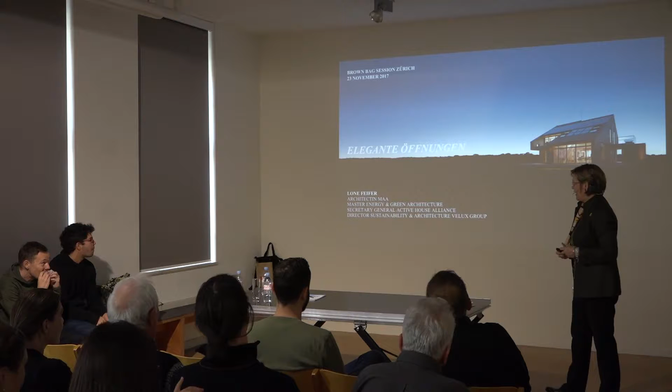It's a pleasure to be in Switzerland, actually always, but it's a particular pleasure to be able to talk about an introduction to the topic of Green Solution House, which is a project that Kasper and I have worked on since 2011. I am an architect by education, specialized in sustainability. And I happen to be director for sustainability and architecture at the VELUX Group. So there is a good match between these fields, and I'm running the Active House Alliance. I'm leading that on a daily basis. I'll come back to what we mean with that.

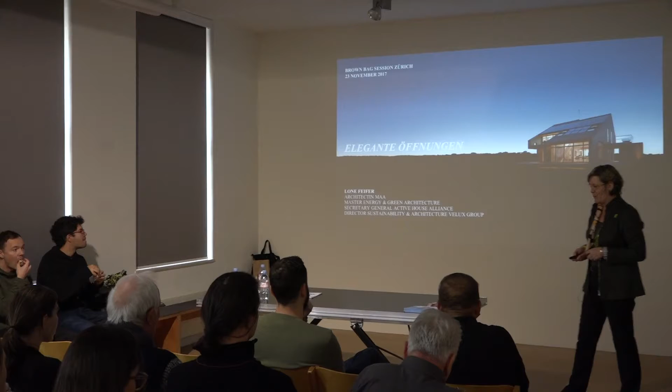First of all, to the VELUX vision, it is probably known to you. We have a vision that we would like to introduce as much daylight and fresh air through the roof. That is our business. And we would also like to be assessed by our customers as the best in class. Well, that's you also.

So this is what we aim for. We have been working with that since 1941, when our founder, the engineer Villum Kann Rasmussen, started VELUX. It was during the Second World War. There was scarcity of square meters. There was scarcity of building materials during the World War.

And he started inventing a roof window, or a skylight as it was at that point, in 1941, which made it possible for a school to make a classroom in the attic. So that is how it all began 76 years ago, and we are still true to this vision, and we believe very fondly in it.

The same founder of VELUX, Villum Kann Rasmussen, said 3 years later, "One experiment is better than 1,000 expert views." And this is hanging on a metal board in our workshop, it is engraved in granite when we exit the headquarters, and it's hanging in a lot of our factories. It's very profoundly the approach to how we deal with experimentation, new products, new challenges.

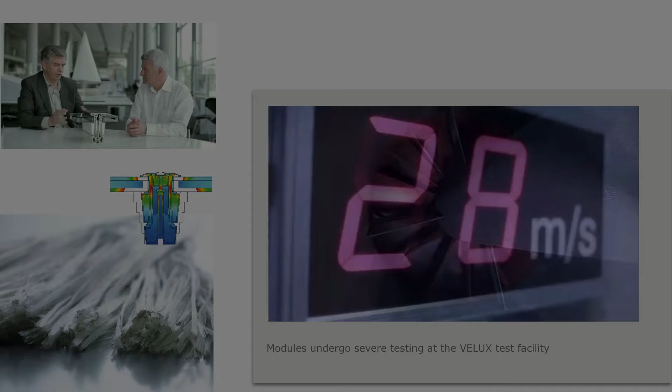When we get back to the PowerPoint, you can see it looks like glass fibers, a little bit like hair before you pultrude it, and you are able to make it into a profile which is very, very strong. It has very good static abilities and also excellent thermal abilities. Here it is being tested in our test center, which is the largest in Northern Europe, and they are putting up the wind speed more and more. It is very thoroughly tested.

You can see the profile here. This is what they developed. It's fairly high as a profile, but also very slim. And for those of you looking very closely, you cannot see the difference whether the profile is openable or not. Something which our sister company, VELFAC, has had a lot of success with in their facade windows. I know that's also known to some of you.

And from there, they developed a lot of different systems for glass roof or skylight applications, which has resulted in the many systems available today. I have a number of colleagues who are experts in this and can tell you about the Swiss applications. And installation was a major focus, because Foster & Partners said, we can go and buy the theoretically best possible product on the market, but it's in the installation. It is often something that has to be handmade and fitted on site. So they wanted something as close to off-site construction as you can get.

And this is where the VELUX approach comes in, because we started with a modular approach, and we have, so to say, defined the standards for classical roof windows. And with this approach, we approach the skylight. It's a modular format, and it's very easy to mount very quickly. You have the building closed very, very quickly. And it is a very secure and tight way of mounting it.

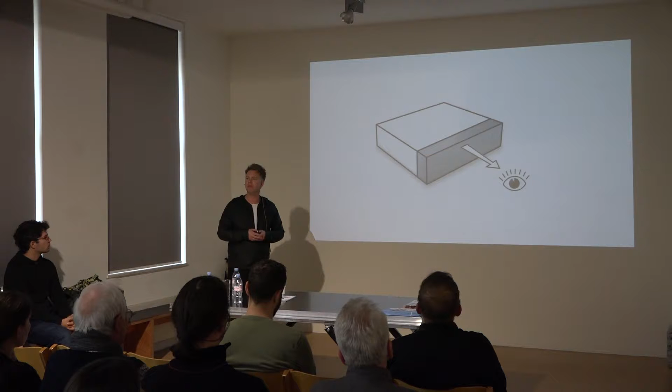It's also a modular skylight. This is, however, custom tailored, but it's giving kind of a signature to the roofscape of the building. But what's more important is how we then define the whole building, that we have access to a beautiful view of the water, but how can we optimize that? Then we are kind of triggering the geometry of the building to actually create a large surface that can view the water. And also within the geometry of the building, we shield from the overheating of the building to give it a great, you can say, energy performance, but also framing the view to the ocean and creating a lot of daylit workspace.

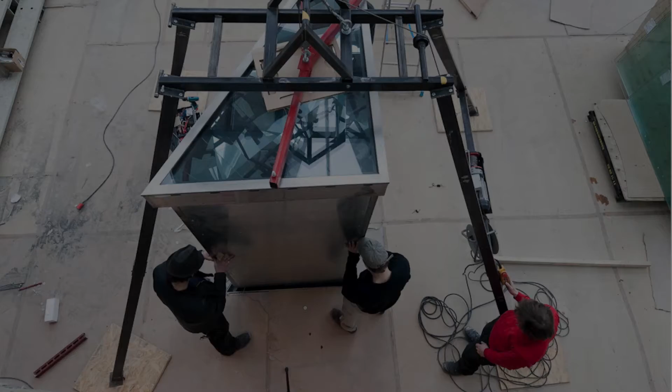We like this roof so much that we also collaborated on making some integral art pieces of this. I don't know, it didn't show. Yeah, here's some. We actually made these kind of 8-meter deep wells in the ceiling, from the ceiling and into the floor. So when you walk on the floor, you actually get this mirror reflection of the roofscape. So it also becomes this kind of artwork created with the daylight and with the geometry of the building.

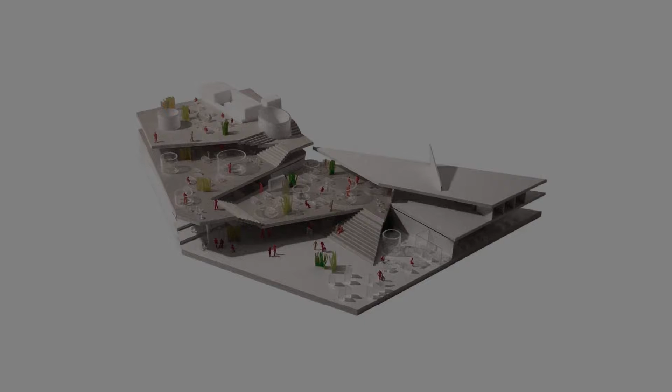But in this talk, I'm more focusing on the qualities of the life inside the building. And I think if we kind of remove the roof, you also see that the whole building is built around kind of a terraced way to create an open space. And we believe that architecture can stimulate the way you work, the way you communicate, for example, the way kids learn, or you can stimulate curiosity. We're really excited about how we, as architects, can understand space and the behavior in the space.

And this was very much about breaking down a large space into smaller divisions. So the people working there actually were dimensioned to the ideal group sizes, but also you use the movement to have people meet, and the staircases as kind of social furnitures. And the lower level in this bank was kind of a public space to the city.

So that's where the bank invited the people of the city in to have concerts and Christmas tree parties, etc. And what's also interesting is that then we deliver the project, but we also go back and we have been monitoring this building intensely for 3 years, like what works and also what does not work, what can be optimized.

So I think that's a key learning, that we are not just object makers, but we also want to have a longer relationship to the people that we are working as architects for, understanding the building. This is a good example because the last 3 years it's been the best workspace in Denmark, and this year it's been rated as I think the second best workspace in Europe. But you can see how these things work, and also how we then try to learn from it.

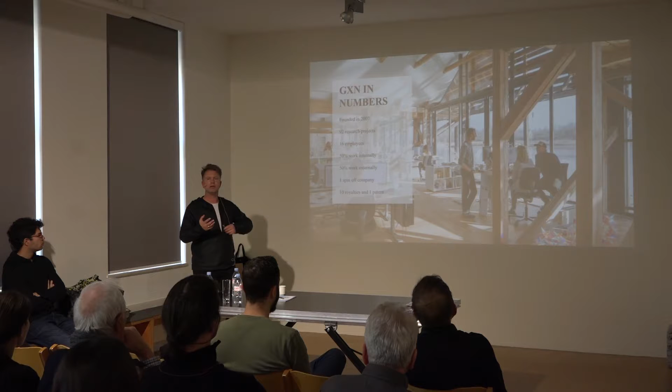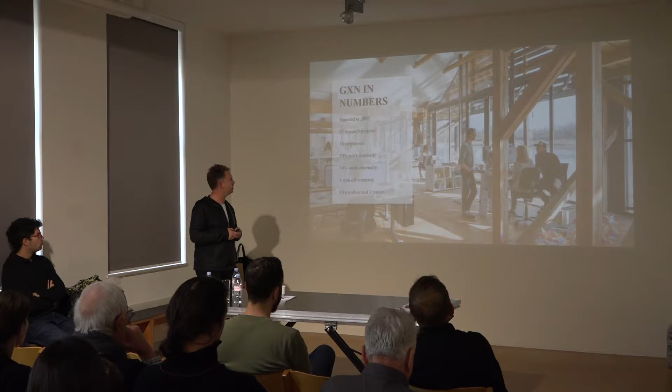So it's becoming this kind of test space within the office, because you can't just take untried materials in on a commercial ongoing project. So we're trying to test and develop and document new innovations before we then can implement it in the ongoing work of the office.

So this is another from my team. He's called Ken. He said, well, in BIG, that's just how we do it. We have a concept, we make a building. It's straight, no deviations. I mean, this is a very easy way to communicate it. But this is how he sees working in GXN. We never have the answer, and we always are exploring, detouring, finding out more than one solution.

So I think the idea is that it's combining a trimmed professional architectural practice with a, I wouldn't say untrimmed, unprofessional, but a question-driven, explorative approach, and that is what allows us to bring new ideas to our buildings. I have two chapters. One is circular design, and I think that's more or less what we've been doing for 10 years. The other chapter is behavior design, and I think that's what we'll be doing for the next 10 years.

So, circular design and sustainability. To me, I had many years where sustainability was equaling energy performance, and sustainability was about addressing the problems in the building industry. We use too much energy, we produce too much waste, the CO2 footprint has to be smaller. But then if you think about nature and nature's ecosystems, everything is in circles there, how all resources can be used for new things. For example, the body mass of ants in nature is bigger than people. And they don't produce any waste. So waste as such is not something that exists in nature.

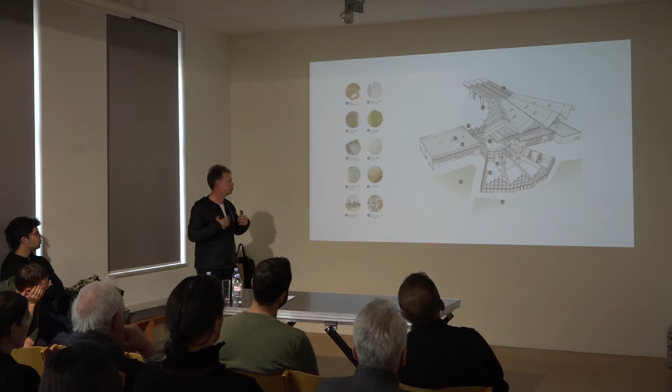So as said, the building is really small. And you see two existing hotels on the right and left that got renovated. And then we squeezed in this kind of fan-shaped conference room in the middle. In total, there are 75 solutions. I'll just mention a few of them.

But just going back to the point that you need to be able to explore the things that create value for you as people. And when you're there, it's on an island, it's beautiful. It's about the light, it's about the air, it's about the nature. And also it's about the rhythm of the day and the seasons. So this is actually what's really present when you're there, the light, the air, and the nature.

But we also had the building to take down, and we reused all the materials. So we said, we need to make this kind of cycle ecosystem on the site. We can take the old glass and foam it up to new insulation. We also took trips to the neighbors and said, this is a granite works. Denmark is super flat, and this island is the only island in Denmark where we can get access to stone. So we were super excited, and also the byproduct of cutting a stone is the dust from that cutting.

So we took all that dust and we took the building waste that was produced when we tore down the buildings, and we created what we called a bitumen-free landscape. So we didn't want any asphalt, any oil in our building materials, and we wanted all the soil to be able to accept the water and use the water positively. So this kind of water and soil balance.

So besides being a building project, it was also a landscape project with some brilliant landscape architects called SLA, making these seasonal lakes and making a full balance so the water could be treated on site, but we also made the geography so we could invite the water from the neighbors when there were heavy rains. So we were making something positive beyond the border of our site.

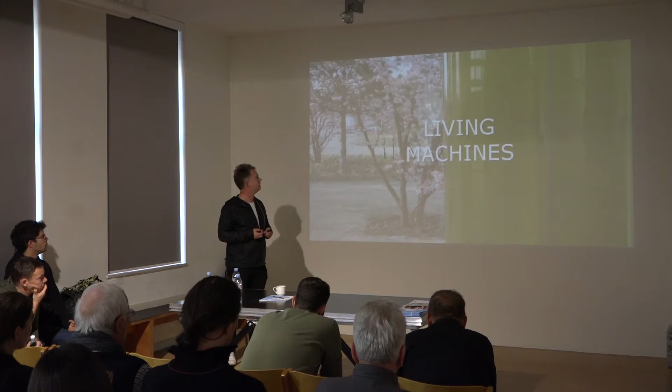So outside was one concept, and we also needed to bring the water treatment inside. The whole process was about establishing these kinds of cycles, life cycle design. And inside, we were working with what's called living machines. So we actually visually put up these algae tubes so we could recycle the water, having the microbes of the algae cleaning gray and black water, having the plants outside be this kind of earth lung, so they could take the scent out of it. And creating green walls, and of course sanitary where you could recycle the water.

And the whole idea is that we have a dialogue between the landscape and the building, and the water can be used and recycled. And again, we needed to do the same for all the materials. So we asked all our partners, we want things to be designed for disassembly. We are very careful when we build, but we are very uncareful when we take apart. So we need to see our buildings as material banks that you are able to take apart and reuse,

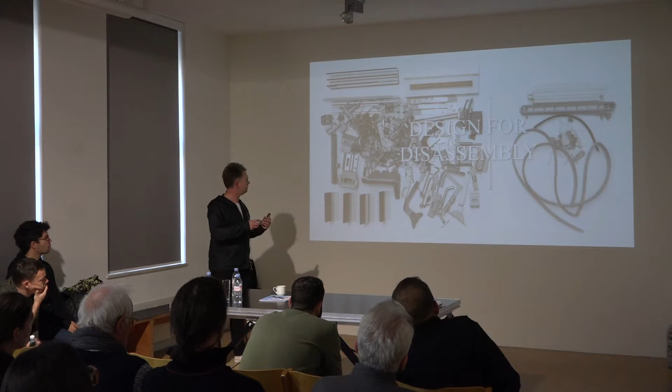so you eliminate waste. And this is actually Velfac, the sister company of VELUX that Lone mentioned, that after this project have documented that they can recycle 93% of all the materials. And this has started to change, at least in Denmark, the sustainability agenda there, so that we think about how we can take buildings apart and how we can reuse materials positively.

Inside, in the hotel rooms, we wanted to make what we call smart rooms, or focus on the air. As Lone said, it's worth a thought that you are actually inhaling and exhaling 15 kilos of air per day, and you're just eating 1 kilo of food. So what if we can provide the best air quality possible? So we developed material filters and material passports. When we tendered the materials, we made sure down to the chemical level that they were healthy. This had actually positive effects.

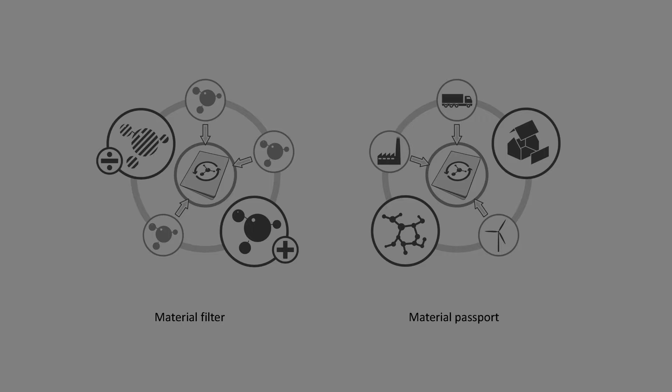We chose paints that were breaking down formaldehyde. We used surfaces free of toxins. We bought carpets that were actually capturing dust particles of a size you don't want to have in your lungs, that you then remove when you vacuum. And in order for the guests to understand this, we developed these tablets together with Autodesk Research on how you can document the indoor environment, focusing on energy, light, air, and water.

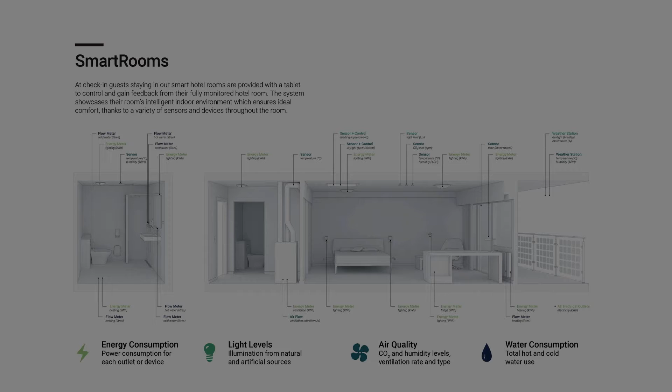So you check in, and you don't see all this. These are technical sensors that are not visible, but make the room intelligent, and make it possible for you as a guest to see what is my consumption, what is the production on site, and what ecosystem am I part of? And you can also not use the tablet if you just want to have a normal stay. But the idea is to make this visible and enable people.

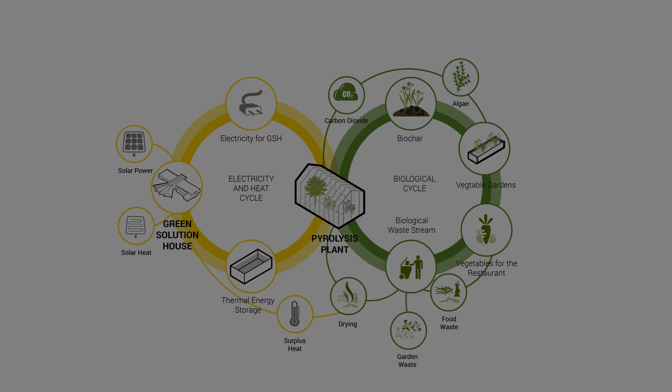We also thought about the energy. How can we work with that? I guess you also saw some of the skylights with PVs in them. We had a lot of different photovoltaic and photothermal, so just taking the heat out of the sun, an electricity and heat cycle. But we also wanted to make a biological cycle. How can we take the food waste and biological waste?

So we designed the kitchen so we could take all the biomass out, but also talked to the neighbors and a hospital on the island about how we can take all the biological leftovers from their kitchens. And we make energy from that, not by burning it, but by heating it up so we can take out the electricity and the heat. But as a byproduct, we get biochar. So actually, we don't put carbon dioxide particles in the air. We just keep them as fertilizer for the soil and the kitchen gardens.

So we try to reinvent how we see energy, and how we can then, with that fertilized soil, grow new vegetables that can serve in the restaurant. And I think this is the last slide on this project, but just thinking about how we can integrate an idea of circular sustainability.

So the last chapter is behavior design. Popularly speaking, I'm saying that's from this year and 10 years ahead. We've been very focused on the materials, on the ecosystem design. Now it's time to learn a bit about what drives value creation in architecture. These are reports that we are super interested in, and some of the interesting findings are that buildings can improve overall productivity and performance by as much as 12.5%. In total, there's a 30% swing between good buildings and bad buildings in the way they perform.

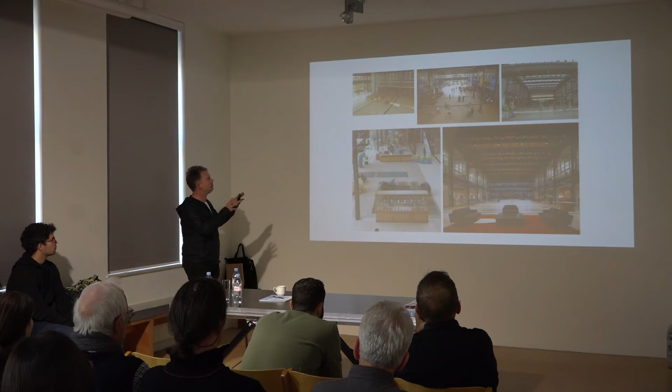I was very inspired reading the Steve Jobs biography, where he says if a building doesn't encourage collaboration, you lose a lot of innovation and the magic that's sparked by serendipity. So they design buildings to make people get out of their offices and mingle, and in that way be creative and innovative. Then I Googled the building he was talking about. And I don't think it was that kind of magical as he mentioned it.

So I think it's also important to think about what is your intention and what is the reality. So we need to think about it, but also document it and learn from the work we do. So we believe that architecture shapes behavior, and we also think, obviously, that behavior shapes architecture.

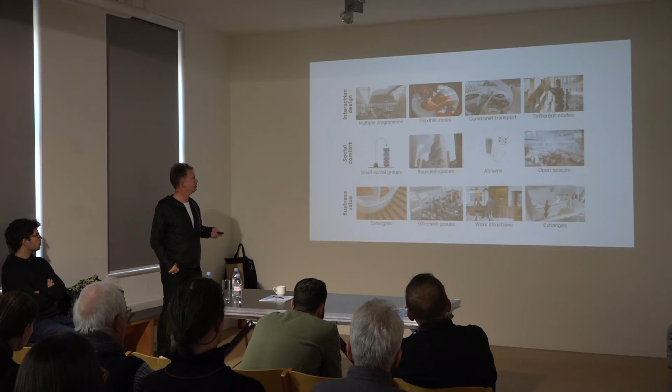So we have put together a research cluster of 7 people that for 5 years will find out what we can learn from business science, from social science, from different sciences and evidence found in research, and how we can relate it to business value, social comfort, and interaction design. So this is our next book coming out, I think, in December. And this is about everyday life in the built environment, how we learned from the buildings that we documented.

So we put out this theory called social affordances, that it's about understanding the people, the culture of the organization and the country, and it's about seeing what the space can do to support this social synergy. So we started to look at our buildings as these kind of social furnitures, and this is a good example

of a building in Norway that is becoming more a part of the city, that connects a residential area with the city center, and we do that by making all these staircases. And also this city every summer kind of explodes into the most popular jazz festival in Europe.

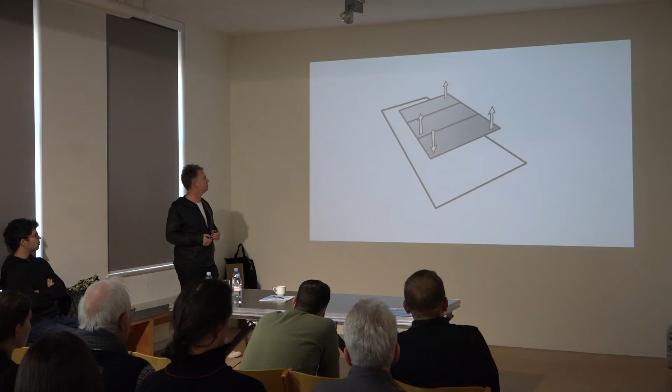So it's about connecting different levels of the city, but also creating all these possibilities for people to sit and view and enjoy the different performances and connect the city. So again, it's about staging these moments and having the behavior in focus when we design.

So I think the last project is what actually was the defining project for us in understanding the effect people have on the architecture they're surrounded by. So this is a central staircase in a high school in Denmark where we won a competition, and the brief from the government of education was, how can we make a school where the students are learning not just from the teachers, but also between each other and between the different topics. How can math stimulate biology, etc.

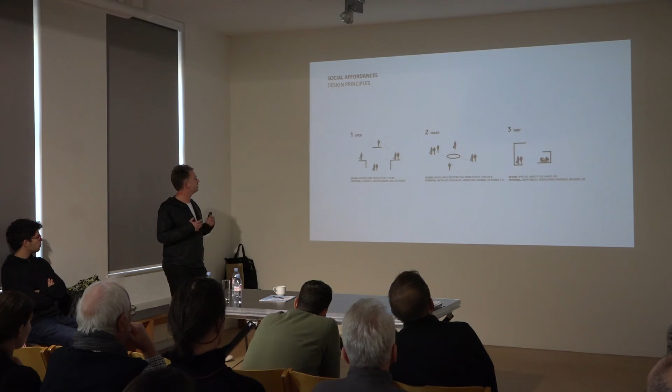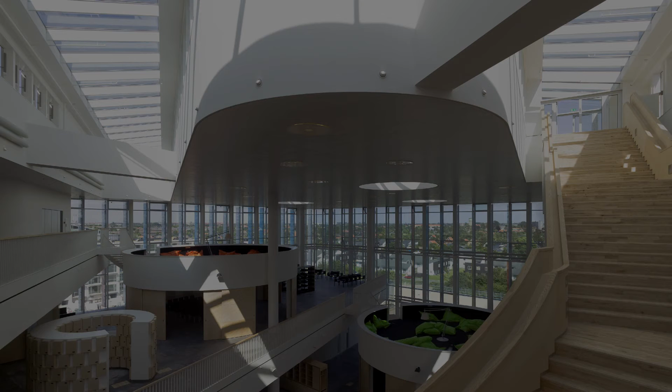So we made this out of these design principles: we wanted to have open space, we wanted to have shared space, but also varied spaces. It's not just to have one big open space, it's about having a whole variation of different spaces. So actually we took away all corridors and made one big open connected space, but then made a lot of different spatial variations. And also this visual transparency allows you to actually sit on the 5th floor and see on the lower floor how you can do gym, etc.

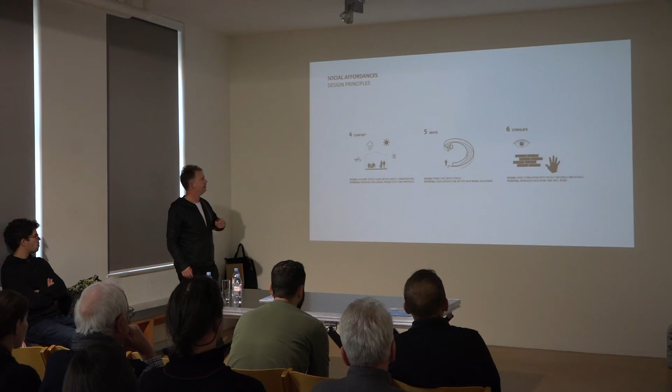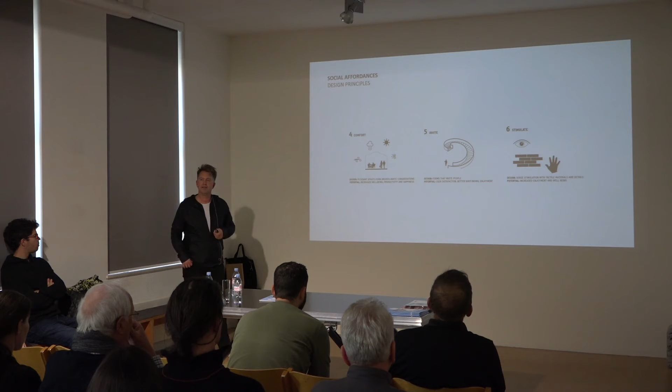It's about focusing on comfort. It's also about making invitations in the architecture, inviting people to use the staircase, for example, and also about stimulating people with the materials that you choose. I think it's super exciting to be here today and see that you have this fantastic material lab that you can access. So again, you see how the students actually are using this space.

There are areas where you can go in and do some more introvert, concentrated type of studying, and in that way the students are seeking and controlling their learning environment themselves.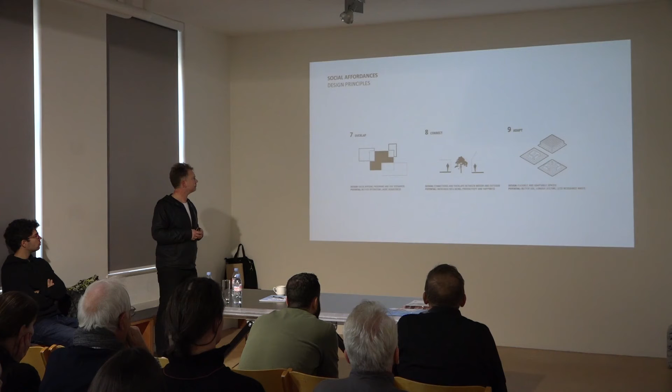And it's about creating overlapping, connecting, and adaptable spaces. So you can see how also this building kind of changes, and also how it's used as how you would study at home. I think this is super important, and for us was a defining moment in actually understanding what value we can create with the buildings that we propose.

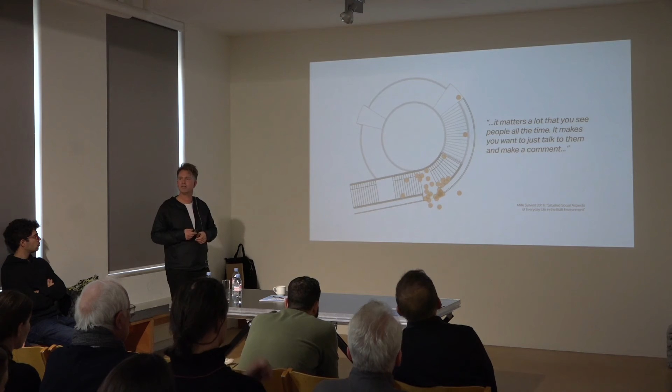And I think a lot of these things you can actually find in the IOC headquarters, even though those two buildings are so different. And we go back and document. One interesting thing: we had this idea that you stop on the staircase and start engaging in conversations, and we were giving the staircase a very wide profile. But we found out that it's actually in the landing that people stop and meet each other. So now we are very concerned about these areas of our buildings and finding out how we can optimize the meeting potentials.

So the last slides are a last research project, and together with VELUX we have started a journey on healthy buildings that promote the well-being of people. And this comes from some other documented research that, again, over a 30-year period of time, the building cost actually gets really small. It's only 2% of the cost that you normally have your full focus on. So if you start to see how buildings can affect behavior, you can actually start to make an impact, and you can argue for the choices you make as an architect.

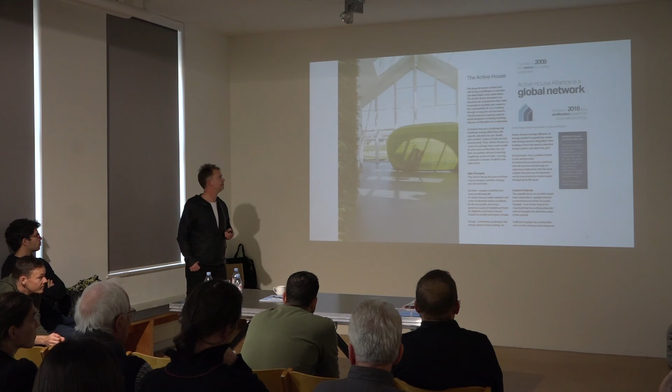So we are working with the Active House Alliance because they, as one of three rating systems internationally, have this focus on comfort. There's Active House, there's WELL, and there's the Living Building Challenge. So again, we spend 90% of our time indoors, half of our time working indoors. So we need to affect that. This is actually how it's measured.

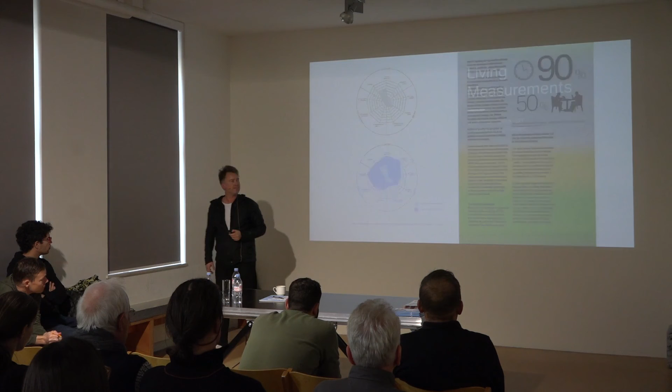This is Green Solution House, you would say, before the renovation. This is kind of a comfort compass. So the bigger the imprint, the better the comfort. And the comfort is up here. So see, after the renovation, we actually maxed out on a lot of the comfort parameters. So you can use it as a tool. But we also want to not just predict it, we also want to measure it.

So Living Measurements is an initiative together with Leapcraft, some software and hardware developers, where we are actually starting to measure the ongoing indoor climate at Green Solution House. So we have these displays measuring CO2, humidity, daylight, temperature, and acoustics, and actually learning from it: how can the building become more intelligent?

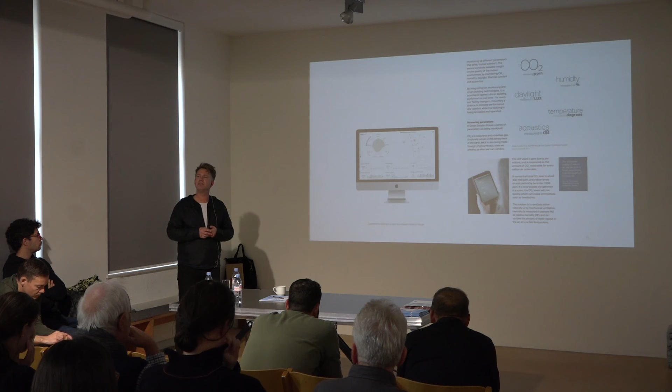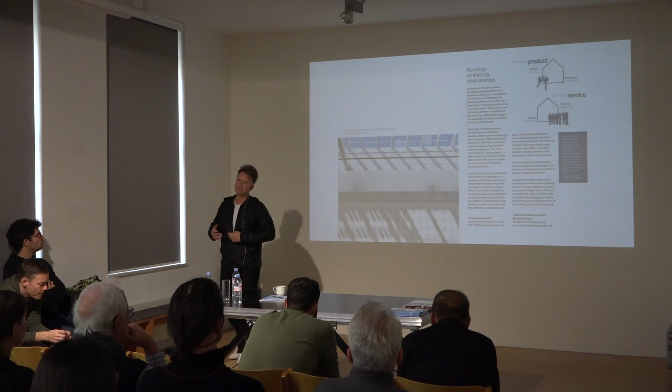And I think it's interesting how you can start to learn from buildings, but also make buildings that are more dynamic and not static. So I think one of the key takeaways is going from buildings as a product to seeing buildings as a service or as a lifelong relationship. And the last few slides are just from the foyer. We had a fantastic photographer who spent the whole day there, so it has a lot of daylight in the day and a lot of moonlight at night.

But the one thing I just want to hammer in is that we believe that architecture shapes behavior. And by focusing on the people and on the comfort, I think we'll start to talk about prioritizing qualities that are the most value-creating that we can do as architects. So this is why I'm glad to be here, Lone, with you. We did the Green Solution House, and we're doing the ongoing monitoring of live buildings and starting to see buildings not as static, but in a dynamic way. So that's super interesting. Thank you very much.

Yeah, dear Lone Feifer, Kasper Guldager, it was really an extreme pleasure having you here today. Thanks so much for these refreshing and inspiring inputs when we look a little bit across the border. It's always a thing we should do more here at the Schweizer Baumuster-Centrale. It should be like a European Baumuster-Centrale. I think you should have a look at the mock-up where you really can see the VELUX Modular Skylight. If you don't have the time now, the mock-up will remain here because VELUX is one of our exhibitors.